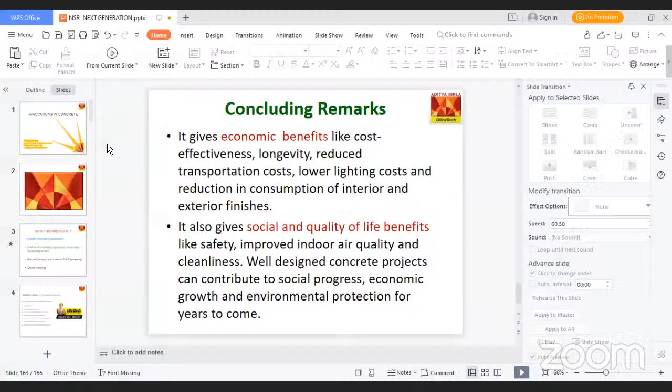Good morning, Srinivas garu. Am I audible now? Yes sir, it is clear. Okay, let's try sharing the screen. Can you give me co-host access? I've already given it to you sir. One second, let me check. Should I stop sharing the screen? One second. I think it's visible now? Yes sir, keep it in full screen. One second madam, let me adjust it. Okay sir, you can keep it like that. Anyway we are starting, pardon me. No need to stop sharing now sir, just keep it on like that. Okay, we are starting anyway. Okay sir, two minutes.

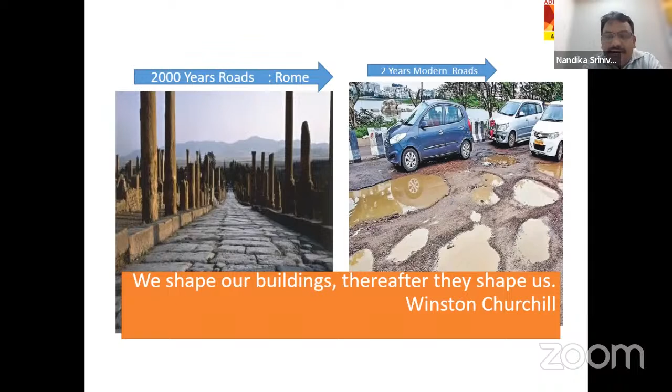Winston Churchill said we shape our buildings, thereafter they shape us. This has a lot of relevant meaning for today's RISE fourth conference, going on in this college, where we really have to build structures with care, love, and dedication, so that they become futuristic, iconic figures, and there are a lot of savings to the countries too.

The part I'm stressing on, locally available, is most important, because if you utilize locally available material, there is a lot of savings in revenue. For example, if you want to construct any building, if you're able to judiciously utilize local material, that gives a great feeling.

And on the quality concern, this photo reminds me of the old people. I remember my grandfather's remarks that old constructions are much better than recent construction. This photo also gives me the feeling that yes, there is a need to change a lot of things in the recent scenario.

Now everybody knows stone was considered one of the materials. Initially, in the Stone Age, people constructed a lot of monumental, durable structures. Still it is witnessed that the Great Wall of China can be viewed from the moon, showing that the engineering techniques were actually very superior, I can say, but not today. Today people perceive it is not.

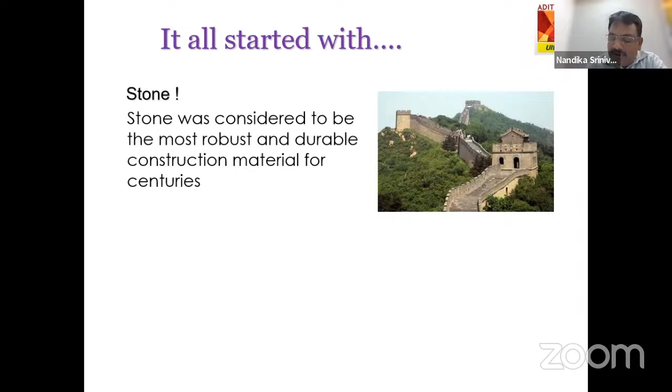But everybody knows stone has a lot of problems. I need not discuss this because many slides are self-explanatory, so I just try to pitch the context relevant to the audience. This presentation can be shared again, I will share it in PDF form so you can also take it. These are the constraints of the stone where we're not able to build faster and efficient construction in recent times, because of availability of time and everything.

So concrete was one complete solution, I can say, also called a flowing stone, where you can mix concrete ingredients with cement, aggregates, water, and whatever else you want to add, take it to the site, and shape it however you want. Like a mold, you can make whatever shapes you need, and at your ease, take 1 or 2 hours to place and finish the concrete. So concrete is like a flowing stone generally.

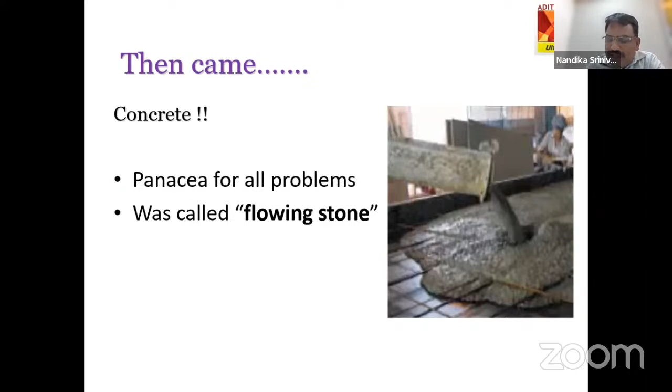That is the olden pattern people generally used to say. Now a lot of changes have happened. People have also started special concrete, which is the topic of today, where we can alter or change the properties of concrete behavior, composition, and performance.

Whatever things you would like to change as per the need of the hour, or the need of the client, or the need of the day, you can really change, because there are properties mentioned in textbooks or guides that certain properties of concrete have to be followed.

But if you really want to change the specification, for example in RMC concrete, we often use retarders to delay the concrete supply at the site when it is a long distance away. But we also ensure there are no changes in the composition, behavior, and performance during execution at the site. That is called special concrete, one classic example.

There are a lot of possibilities, which I will be showing in this slide.

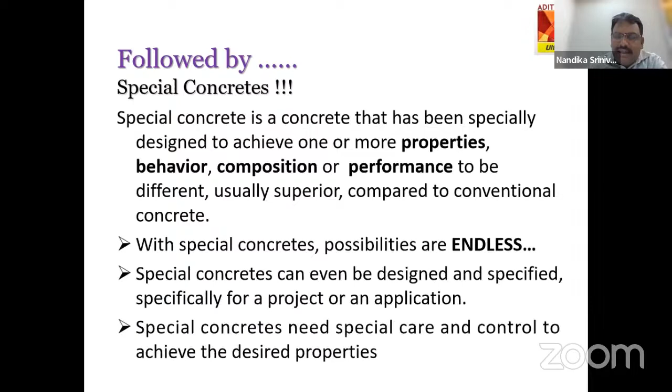These photos are from one of the challenging projects during the transition time of Telangana formation, where the government decided to give free 2 BHK houses to the entire people of Telangana, which was a promise agenda in the election campaign. So when the government came into power, they wanted to implement this. We went to one of the sites, called Eravalli, which was one of the starting projects of the 2 BHK scheme in Telangana.

This is the house, actually taken from my camera. These are some glimpses of the houses where we wanted to replace the old mud structures or old houses with new innovative technology.

But there were two major constraints. One was the challenge of time, because they wanted to complete it very fast, and the other was cost effectiveness. Anything related to speed of construction really requires a lot of revenue to invest. So the challenge was thrown to the engineers by the government: what is the best solution we can give to the people of Telangana with low cost housing techniques, very fast building technology, and durability also. These were the major challenges thrown to the engineers of Telangana, and there were a lot of options available.

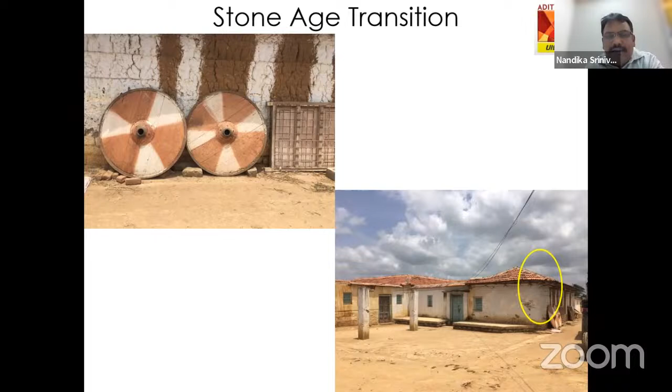People suggested this and that, but ultimately they chose a technology called Rapid Monolithic Design, RMD, where they used aluminum sheet centering and used to cast the building in a very fast way. In the order of days, every week the superstructure was completed very fast, because once the foundation and plinth level were constructed, it was very easy to construct the houses.

This is actually the place where the site was taken. It was really a low cost technology, and it was very fast also. People also admired that the quality of living was very good. So these are some of the glimpses. Now that is old technology, but this was a challenge for us.

So when we look at this, there are some virtues of concrete. Concrete is very safe, but many people are under the myth that concrete uses a lot of natural material resources, and that it is an energy-intensive material which consumes a lot of energy and emits a lot of carbon dioxide, which is a threat to the environment. But recent technology changes, right from the inventory machinery to the process making to the materials used in manufacturing cement as a raw material in concrete, have helped reduce carbon dioxide emissions significantly, from 1.5 tons to 0.75 tons.

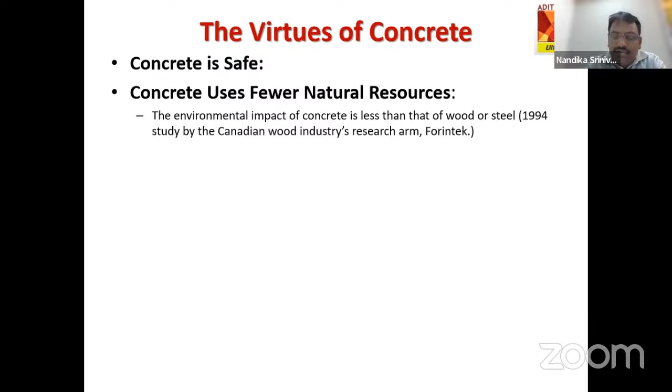Efficiency and sustainability have also been taken care of. Gone are the days where people always related concrete to environmental damage. Concrete uses supplementary cementing materials, which will be discussed further. The beauty of concrete is that it uses recycled materials very efficiently. Very few industries actually use recycled materials to make a sustainable product like this.

For example, people can add anything to concrete, like fly ash, and everybody knows GGBS is commonly used nowadays. But many people also use plastic, rubber tires burned for fuel to give efficiency, and even leftover oil as fuel for the machinery to run. They use a lot of such materials. I'll be showing what materials can be used in concrete to give a sustainable product.

Having said that, I was also referring to CO2 emissions. When concrete is used with blended cement, all these benefits can be achieved: reduction of CO2 emissions, reduction in fuel consumption, use of supplementary cementing materials, utilization of qualitative materials, and improved production capacity.

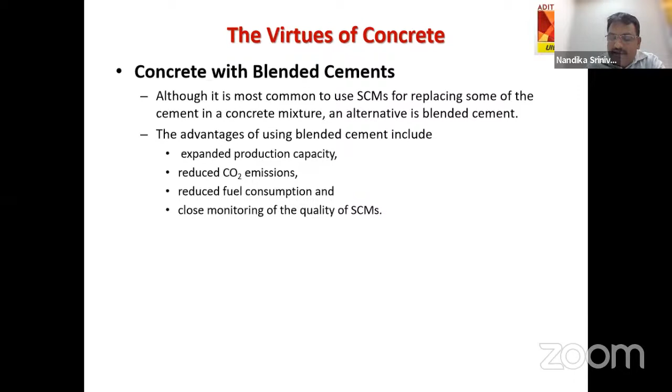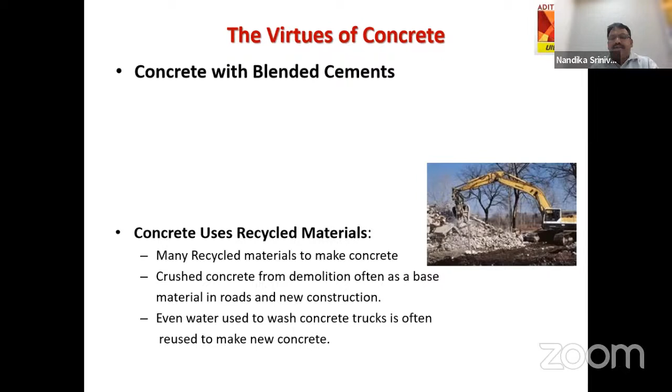These are some of the recycled materials being used. Even the water used to wash the trucks is used for making new concrete. If you wash the transit mixer, the water contains a lot of cementitious material, so that can also be used in making concrete.

These are some of the aesthetic aspects of concrete. If you see the beautification of concrete, we can build a lot of structures with it, especially tall structures, and marvelous buildings around the world. Now every city or country, if they want to showcase their strength or invite tourism, wants to build the tallest or most iconic structure.

So now the pride lies with each and every part of the country. They resemble the country or city by its famous structure. Earlier, people used to relate or resemble their city with a river or food items, but now people want to recognize their place with an iconic structure.

For example, if you go to Dubai, you can see the Burj Dubai. We will not say that it's famous for its beautiful beaches or facilities, but we'll relate it to the Burj Dubai. People say the Eiffel Tower for Paris. There are so many buildings I can relate this way.

So now, friends, that is actually good news for all of us as young engineers. The opportunity lies for us if we really work in civil engineering and improve our subject matter, especially in tall structures. Then a lot of people will be hiring you in a big way, because the order of the day is tall and iconic structures.

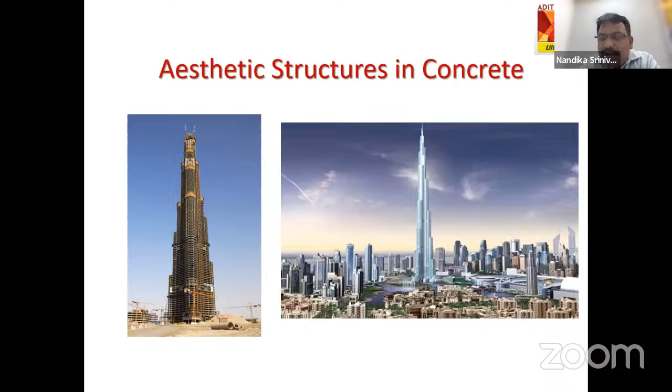These are some examples of people fighting to construct the tallest structure in their cities. Where once we wondered about 120 meters, people are now going for 800 meters, even 1,000 meters. There's a race for each and every city or country to construct the tallest structure, which gives insight into the lot of opportunity for civil engineers as a whole.

Going back to my earlier slide where I was saying that concrete is often considered a dull and gray material, now many techniques have been developed where we can really make concrete colorful by using concrete dyes or pigments induced in the concrete so that it becomes beautified.

This is one of the talks of the day - recently people are talking about 3D printed concrete, and a lot of innovations are being done in this field. People are making houses from 3D printed concrete, and now in Bangalore, 3D printed structures have also started being executed in recent days. Soon there will be a time where people can order a building as per the design they want, the color or the texture they would require for the concrete.

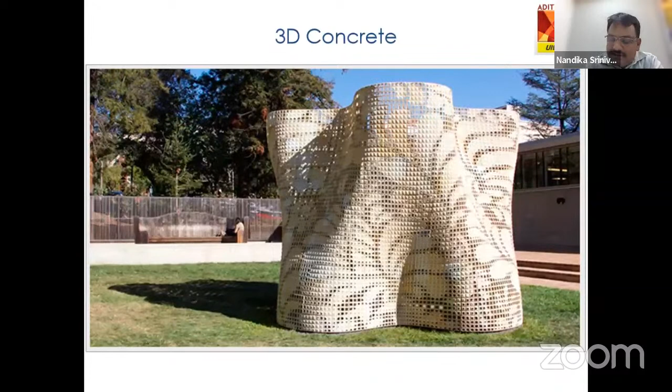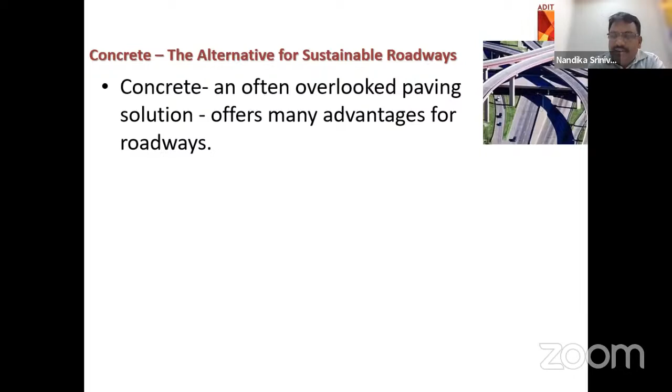Now there are changes in this - the connectivity part I was referring to. Sustainable roads have been built, and the advantage of this new technology, which I'm going to refer to in the next slide, is that it also reduces or eliminates the problem of potholes.

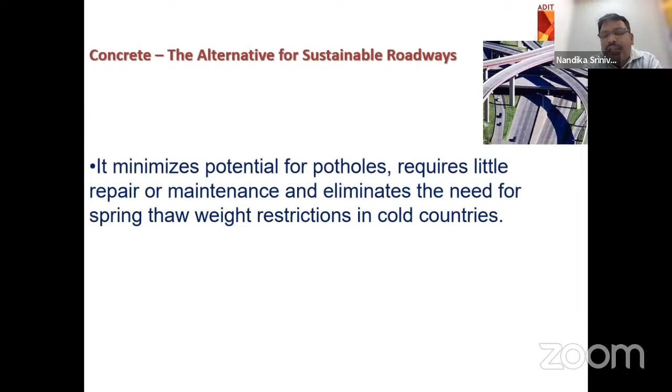If you follow the industry now, people are talking about pothole-less roads. This is a new technology we have recently started - a product in the way of cement, where it repels water molecules or water particles in the cement itself. What happens is cement is often transported, and even small moisture can really hamper the quality of the cement. With this new technology using hydrophobic polymers mixed into the cement particles, it allows transportation for a longer period of time, storage is improved, and even in case of less moisture or sudden rain, we can really protect the cement with this small technology.

This is actually proving to be an innovation in the industry right now, where people are using it. It also allows less water to be used in the cement - basically it doesn't allow excess water to be taken in. So this is the new product we have recently launched in cement.

I was talking about potholes - this technology is called white topping technology, and many cities are now adopting it. We have also done it in Hyderabad, on road number 10 in Banjara Hills, where we took a 1 kilometer sample as a trial for the Government of Telangana, and all the cement companies participated and showcased that this road would actually be without potholes. Even now, after 12 to 13 years, I can say the road is still performing very well.

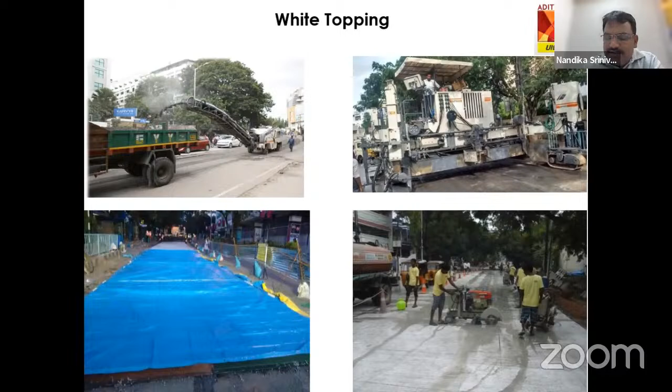This technology is one of the sustainable, innovative technologies that people can try. If you see the finishing, it's wonderful, and it can be constructed in a very fast and efficient way with very little manpower. So many cities have been adopting this. These are some of the recent advancements in concrete and materials.

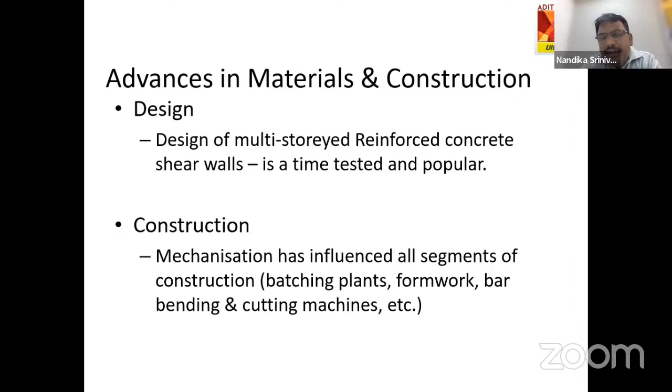There are some changes now, with people using a lot of new innovative materials. For example, in batching plants, I was referring to this aluminum formwork, which is very light in weight. It can be fixed with 2 or 3 laborers with a proper plan, using a nut and bolt system.

It also gives the advantage of addressing the shortage of quality manpower. Whenever there's a shortage, we can train people at the site and they can fix this formwork in a very fast and efficient way. People can use this as rapid monolithic design, or RMD technology, as we call it.

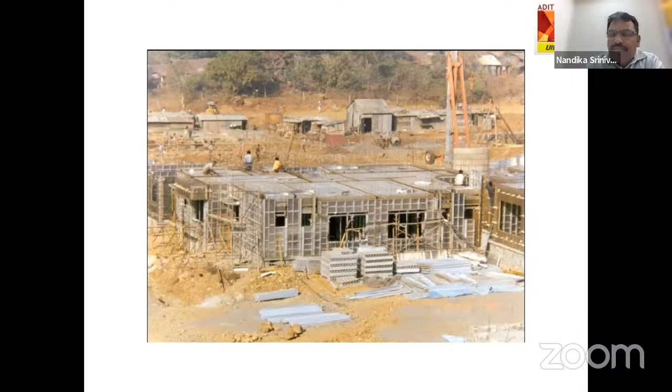This is a glimpse of a site where it's fixed - you can see only 3 or 4 people are working on the entire 1,000 square foot building. Compared to a normal conventional concreting site, it would take more than 12 to 20 people executing the job. These 3 or 4 people can even build the staircase in a very fast way without any joints or distortions in the concrete, which is still challenging even now.

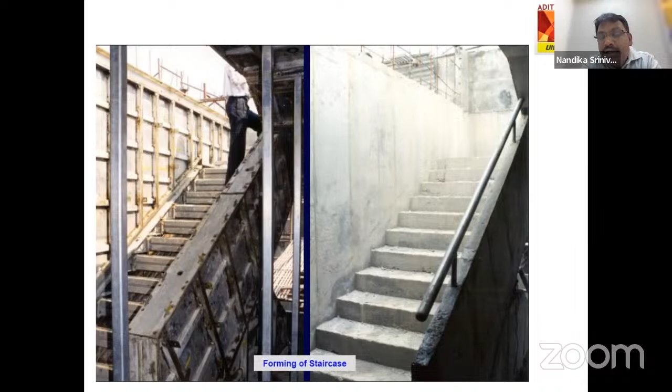People often cast the staircase separately or differently. But with this technology, the staircase can also be part of the total slab process, which is a major advantage.

This is a closer view of the building where everything can be fitted in a single nut and bolt system. You can remove it and take it to the top - first floor, second floor, whatever the number of repetitions. Repetitions can be done in a faster, easier, and more efficient way. And you can see the finishing.

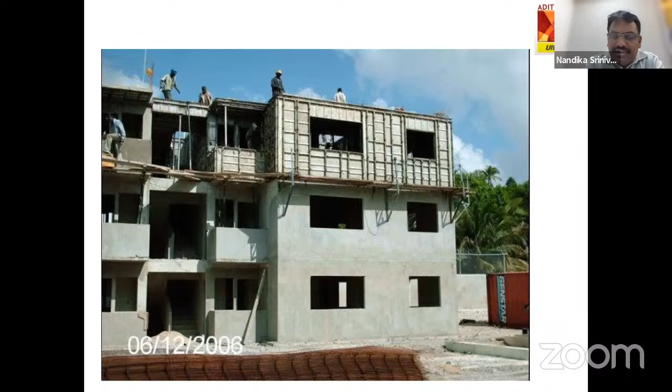This is the technology we utilized in 2006. If you see these buildings in a better way, the entire 4-story structures were completed in 16 days. So this superstructure method is very fast and easy to construct.

Now this technology is being followed by all the multinational companies and big construction companies for faster construction. They're using this technology to improve the rate of construction, because for any given project, it depends on revenue - the faster you can construct or hand over the project to the client, the greater the savings. So this is one of the proven technologies people are using.

Some plastic formwork is also coming into the market, where even for smaller buildings like 2 BHK, 1 BHK, or individual houses, people can use this plastic formwork to improve the quality of construction, because the recent use of MS steel is very heavy in weight.

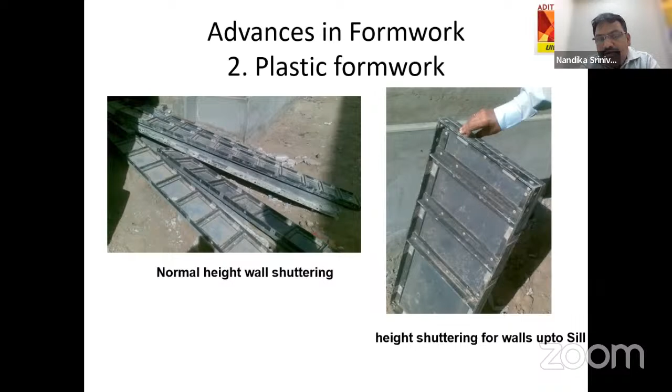There can even be distortions if it's not handled properly, so the concrete won't come into the proper shape and there will be no alignment. But if you use this kind of plastic formwork, the speed of construction improves and it can be used by a single person, like a simple nut and bolt process, and the alignment will be proper. These are being used for retaining wall technology or whatever else is applicable.

So these are some of the innovative materials being utilized now. Everybody has heard about foam concrete - this is a lightweight concrete compared to conventional concrete which is 2,400 kg per cubic meter. The density here will be 400 to 1,600, making the concrete very light. It's used in different ways, like for bricks - autoclaved aerated bricks - which really improve the speed of construction.

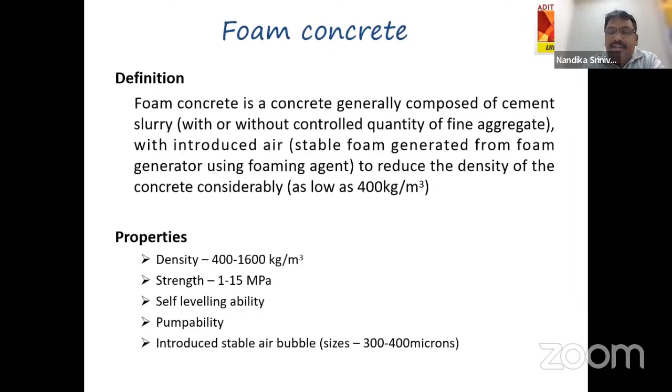If it really plays, it is really great. Can you just tell me if this video is playing or not? So this is one of the showcases in our product where it really floats. The concrete really floats in this one.

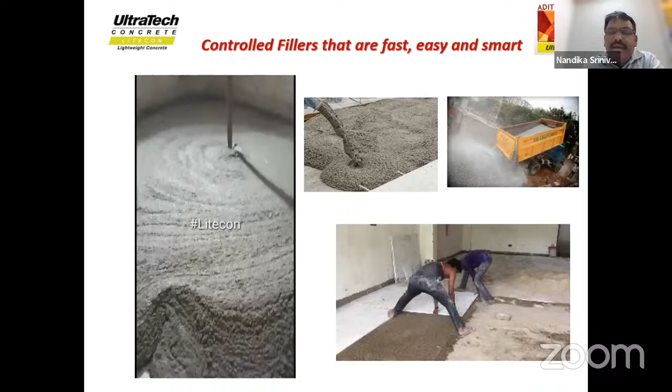From Ultratech's point of view, we have converted this product into the form of lightweight concrete, brand name called Litecon, where this will be a lightweight concrete used for screed concrete or sunken slab concrete, wherever you want to keep it. And if there is an alignment problem for bigger areas of slab, it can be used as adjustment concrete.

These are some of the applications where people can really use this one. So these are some photos, and these are free flow concrete, which everybody knows about as self-compacting concrete.

Ultratech comes in the brand of Free Flow Plus concrete, where you can order it through RMC, addressing problems related to congestion of reinforcement, which is required a lot now because people demand durability and earthquake resistant structures.

The steel actually goes in a huge quantity, and if you use conventional concrete, there will be a problem because of the size of the aggregates, the flowability, and the air voids. So this concrete can be used in a better way.

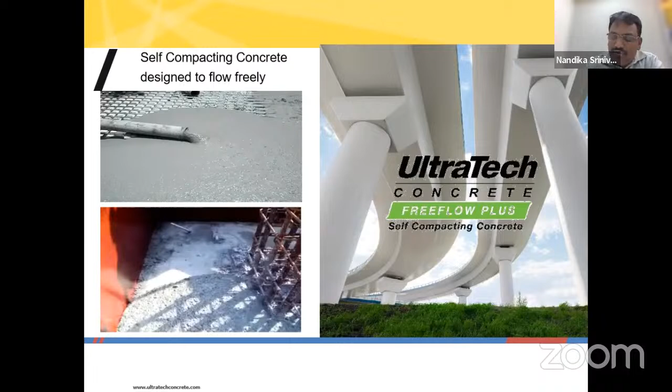Something I want to relate to the context of this presentation: I will be showcasing new innovations in concrete, and relating these to real applicability, including the commercial aspect, because we perceive that we learn a lot of things, but when you go to the market and search for the product, it is not available.

So what I'm trying to input here is that my focus will be on concrete which has been innovative and also available in the market. These are some examples of wherever it is required, and I will also be showcasing some case studies.

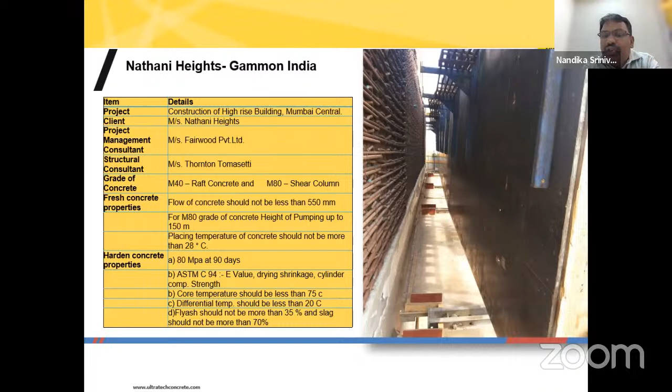In this case, the congestion of reinforcement was a challenge for us, and the temperature was also a challenge. So we used a free flow concrete where, if you see the fresh property, this is M80 concrete, and the temperature should not be more than 28. We ensured using this latest technology that we utilized this one.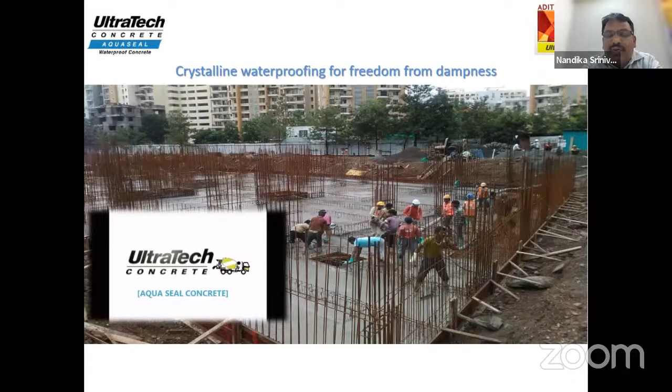In the recent past, a lot of fire accidents have happened in the city of Hyderabad for so many reasons which I don't want to discuss. But having said so, if a fire accident happens, it leads to a catastrophe because many lives will be lost. We have seen this in the past also, because people cannot move out.

The whole idea is that if you can really reduce the spread of fire in a concrete structure, if it catches fire, that spread can be reduced for up to 4 hours. This means we can evacuate people in the buildings to a safer place, and we can also save our costly belongings—that itself is a great achievement for this concrete.

So Ultratech comes with a fire-safe concrete, which is a fire-resistant concrete based on vermiculite. It also allows fire spread to be reduced for 4 hours, so it delays this process.

Especially it can be used in ducts, where fire typically spreads, and in lift areas, where the spread can be eliminated or reduced. So these are areas where it can be applicable, and it helps a lot. These are photos where we have used this concrete in different places—ducts, lifts, and passageways.

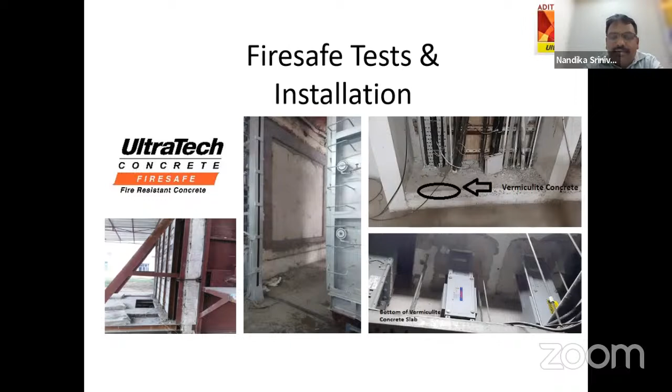Everybody knows some pervious concrete. Now we are basically trying to change the property of concrete. Normally we relate concrete to being hard and impermeable—it should not allow water to pass through, because if water passes through the concrete, it will contact the steel present in the concrete and start the corrosion process, which will definitely affect the concrete structure. So the durability will be at stake.

Having said that, concrete properties can really be changed—this is called innovation concrete. This is pervious concrete which allows water to pass through. It's also called no-fines concrete. This is a photo of the cube we cast to test the strength of the concrete.

If you see, the holes—the passages—are actually interconnected, which means water can flow through, but at the same time the strength is not compromised. This means it can be used in many places.

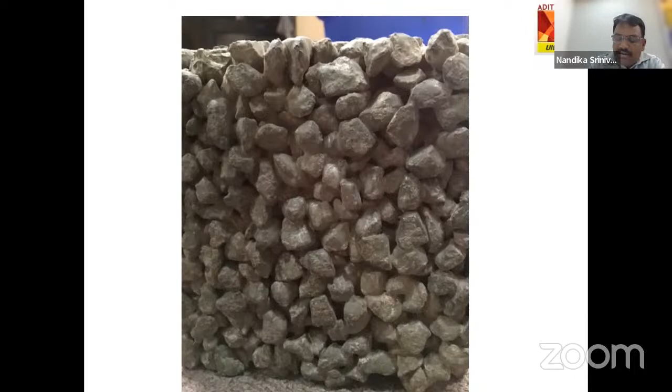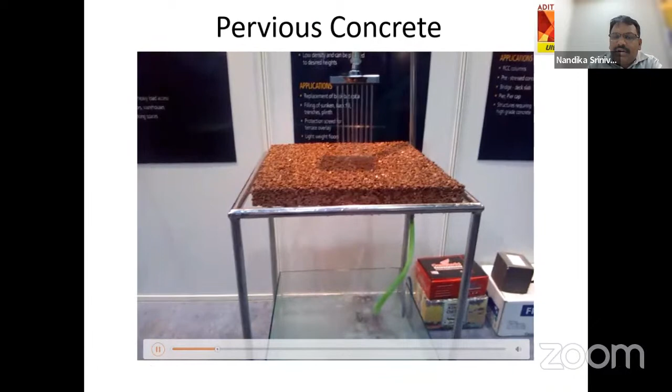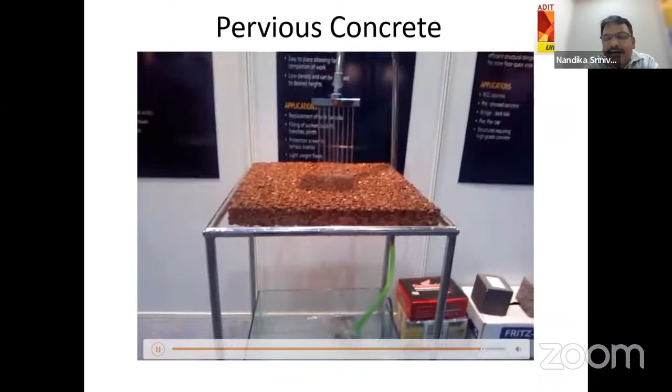Because of the many problems people face, they started thinking differently. This is one video I can show, where water is flowing from the top and going directly down—it's like a filter kind of thing. The beauty is that it allows water to pass through.

Now for the applicability—people say every city has now become a concrete jungle. They say if you use a lot of concrete, there are no trees, and there's a lot of deforestation happening again.

The main problem with concrete roads, people say, is water permeability—because the water table isn't being improved, since water isn't percolating down into the earth. So what's happening now, even with heavy rainfall...

In parking layouts, walkways, or areas near rivers or water collection zones, we can use this concrete to allow water to pass through, and it will be stored in a better way. This can also eliminate the problem of water scarcity, which has become a burning issue for any city or country now.

So this shows how we can reduce these issues by using the pervious concrete while also allowing for environmental benefits. These are the applicability areas—parking lots where a lot of trees are present. We can use this concrete, and water can be used as a source, allowing the trees to also live.

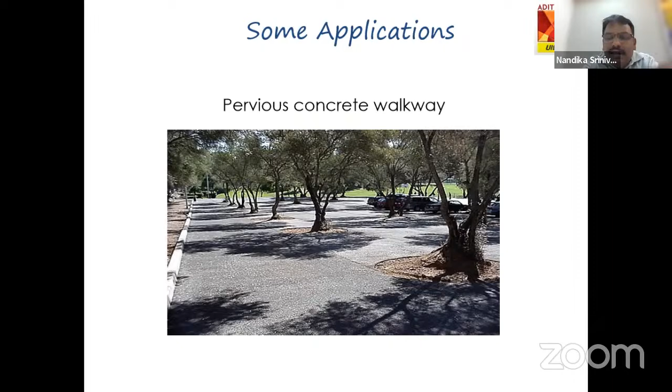We can also sustain, and all greenery will be there. So these are some of the applicability, right from the swimming pool decks to pavement edge drains, bridge embankments, swimming areas, everywhere we can use this.

So these are the concrete which, as I was referring to, the normal and conventional concrete. Now architectural concrete is also playing an important role in concrete. People are thinking about beautifying concrete, and this also requires a lot of effort and work.

So some examples where I can really show you how concrete has been used in beautification. This is called polished concrete, where it replaces tile and flooring. In large areas like shopping malls where footfall is very huge, using tile or conventional flooring leads to a lot of abrasion, meaning the texture gets spoiled within 2 or 3 years.

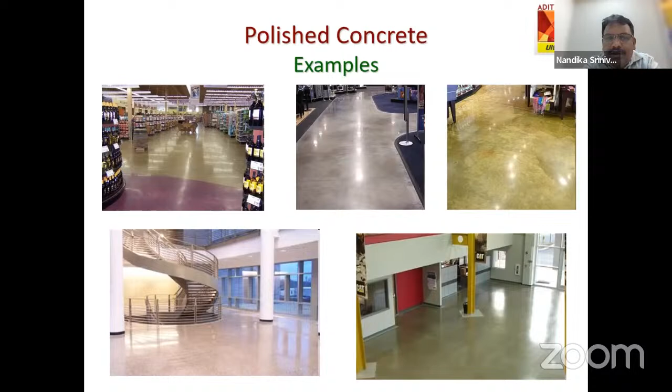But using this innovative polished concrete for flooring with high strength parameters, this can be eliminated, and it gives a lot of aesthetic value, because it gives a wide and glossy finish. So power consumption will also be utilized in a better way. This is an advantage, and some examples are all been used with exposed or glazed concrete, where polished concrete has been used.

So we have Ultratech, who have also come with one product called iFloors, which is used for industrial flooring, where we use steel fibers, because industrial flooring is different from commercial flooring. It requires a lot of strength because it uses a lot of machinery equipment on the floors. So to make durable floors, we use this. This is a grade where right from M30 we can also use this.

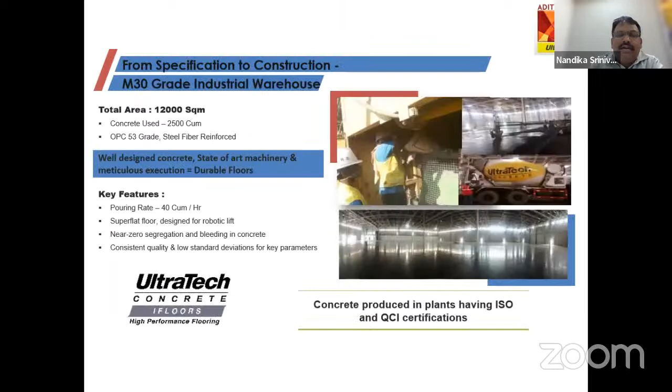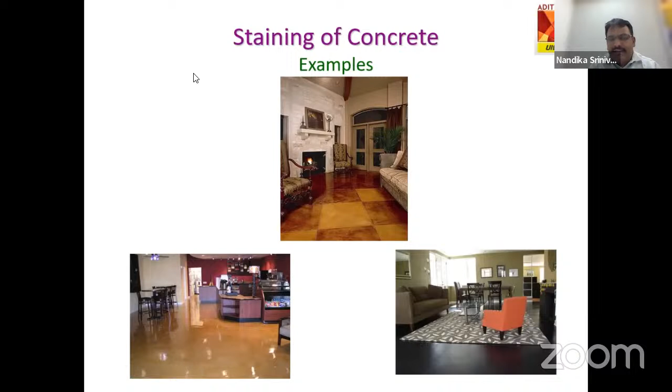So people are also trying to beautify by playing with the chemistry of the concrete, where they etch acid on the surface of the concrete to beautify it. These are some of the concrete types utilized across the world, where staining of the concrete occurs, where people use acids and everything to change the texture or top texture of the concrete. So dyes are actually used.

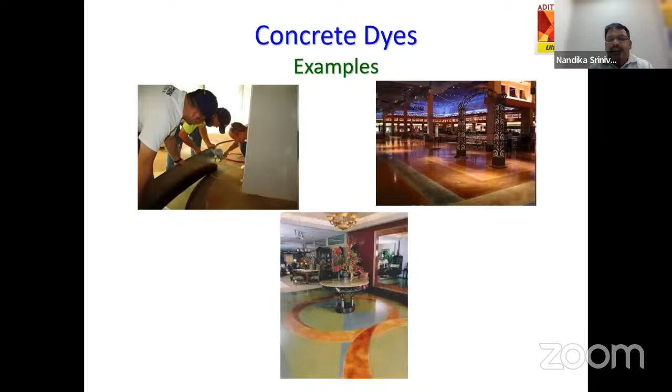I was referring to colored concrete now. I'll show you some of the concrete which has been used with dyeing or coloring agents. See, some of these features, these colors can be made using color dyes or pigments in the concrete. We can really make this, and these are some of the advantages of decor. Like this, it is made.

We are replacing natural stone now. What is happening here is that, as I already told you, there is a lot of disadvantage in using stone, because of availability, robustness, transport, everything. So this can be as per the flavor of the customer or client. We can really make concrete into stone-like forms, or better landscapes. So you see, these are areas where we really beautify with colored concrete, where all these are being made with concrete.

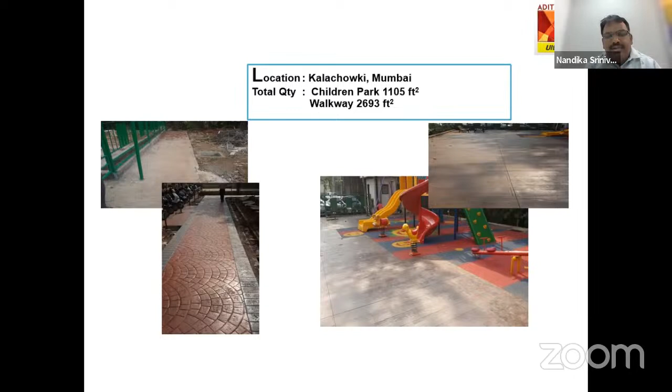This is not with tiles. So this actually gives people a nice feeling when staying there, especially children, who want to spend more time in the play area and everything. So this can be interesting too. Some people use stamp concrete, where it replaces natural stone. These are some of the things that really improve the structure's life, everything.

So these are the forms, like wood finishing, that we can also achieve. Whatever finishing you want to achieve, we can use exposed aggregates, sand wash, and stain concrete.

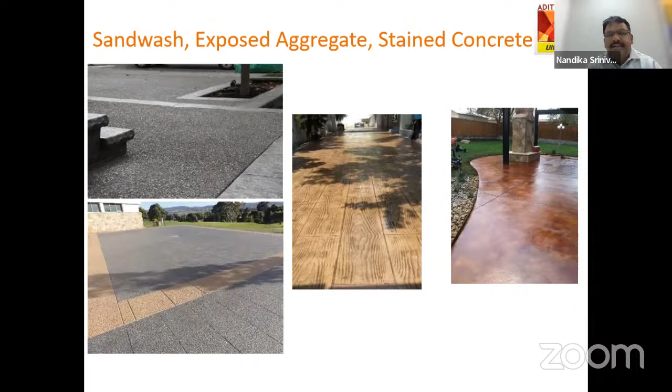And now people are talking about strength beyond the limit. Earlier, people used to refer to concrete as durable if it attained M30 grade, which was also very good. M40 is one of the things which can really be attained. But ultra high performance concrete makes your structures very slender, makes your life very easy, and it is also used for precast elements, where it gives you structures very speedily.

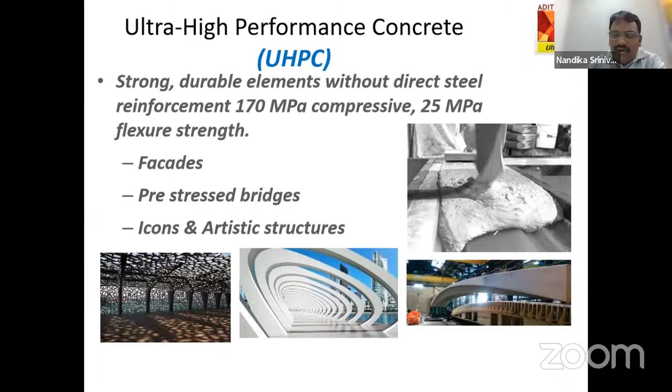So this can be used. This is ultra high performance concrete, where in Ultratech also we have a brand, Ultratech ultra high performance concrete. Although the stencils on the concrete surface, like people are using this technology, where whatever design you want to transpose on the top surface of the concrete, we can really do it with this technology. This is one example.

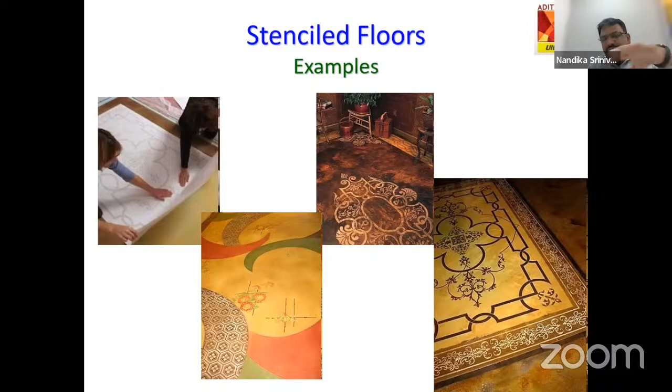And this has been used in a very iconic structure. Now there is concrete furniture. You can make tables, sitting places, pots, whatever things you want to make. Concrete is actually coming up as a real example where many people are using it as furniture. If you see this, the advantage of concrete is that it is very slender and it almost resembles wood.

Wood has a lot of problems, for example termite problems, decay, maintenance - everything is a problem for wood. So this is absolutely a zero maintenance thing, where it can be made in a simple workshop and assembled in a place, and it will last.

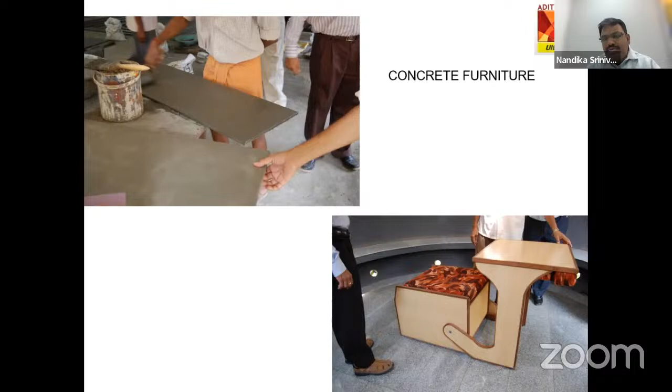So especially in colleges, you can really put forward this furniture as a replacement for wood. This is one example where, see, something which even can be made with this concrete - seating places, even some decorative items, even the staircase which has been there. So all these can be made with concrete. This is the beauty.

We're trying to replace wood. We already replaced other materials. Now we are trying to replace steel also with this superior quality of concrete, where gates can be manufactured. All of this is done with concrete only, not steel. So please remember, this looks like a steel one.

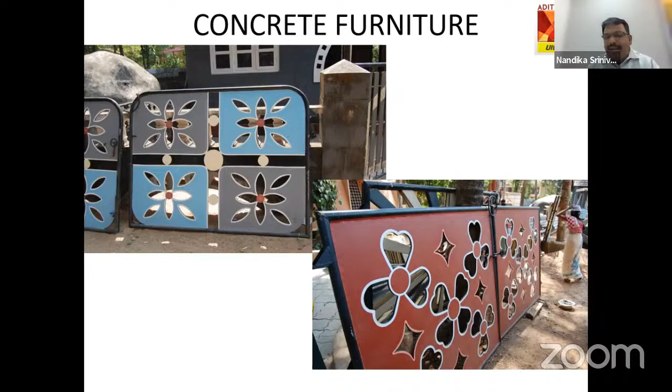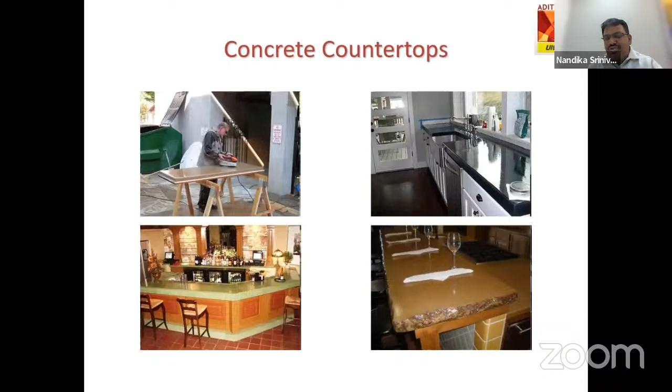It's much more durable and effective than steel, because steel requires a lot of painting after that, and maintenance. So people are making countertops, for example. These are some examples where concrete really replaces natural stone or granite, because concrete can be polished in a better way. These are some examples from the internet.

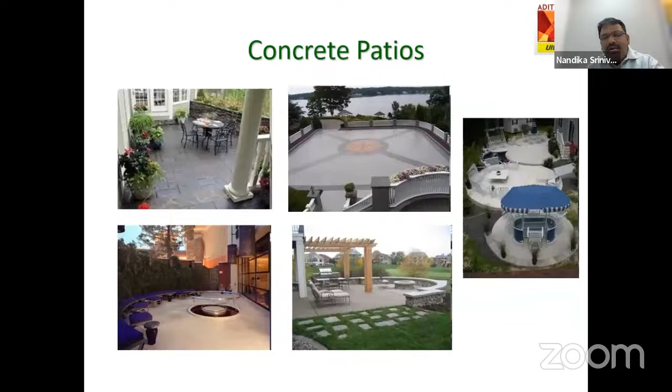I don't want to spend a lot of time on this, but I just want to expand your thought process on the horizons of how concrete can really be utilized in a better way, analyzed for our construction. These are outdoor parts, patios, where really all these are made with concrete. These are some things I really want to showcase for young engineers, so that they can also try new things in this process.

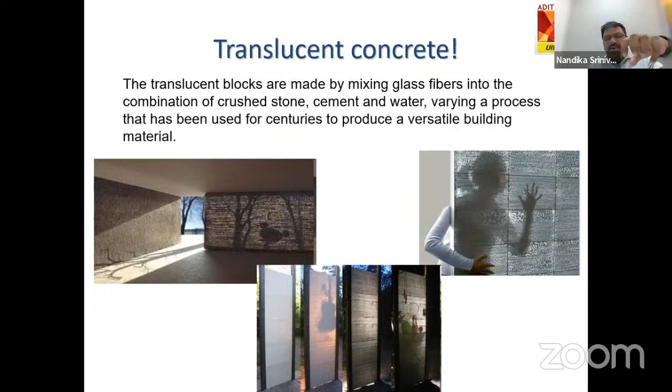See, this is called translucent concrete, where it behaves like glass. It behaves like glass and is more durable and unbreakable also, I can say. So when light is thrown upon it, it behaves like glass. When light is not there, it behaves like normal concrete. For easy understanding, I can show you some photo and video.

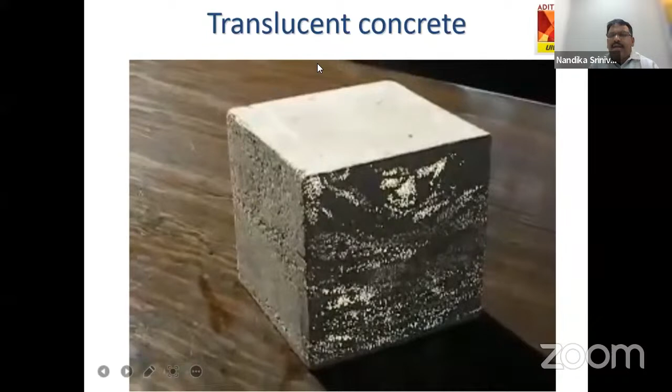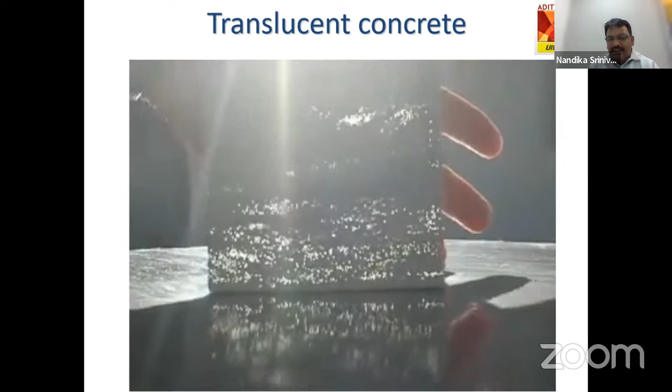This concrete is called translucent concrete, where if you induce light, it behaves like normal glass, right? There are a lot of crystalline products and other things being used in this. So if you can see, you can even see your shadow or what is going on behind it. This is like a transparent material.

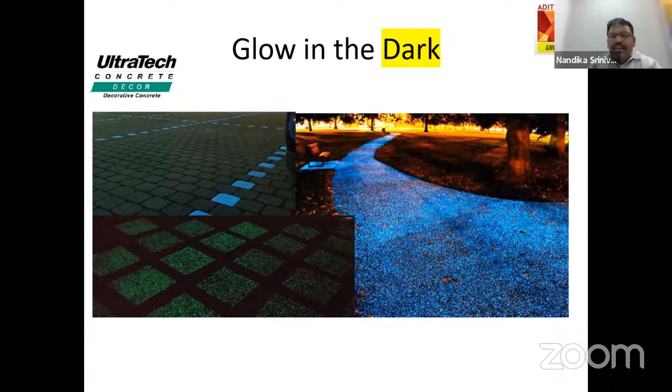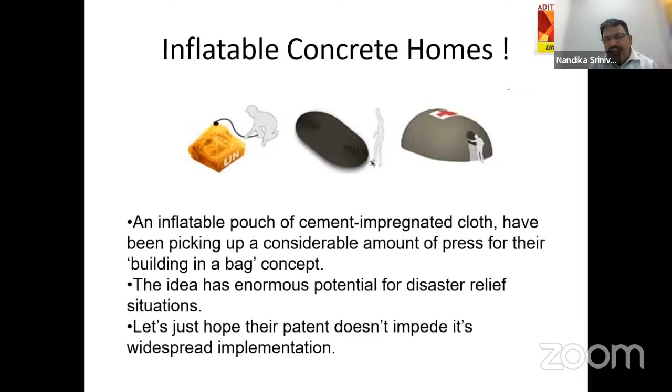So concrete can be bendable. People think concrete is not bendable, but with a lot of fibers, we can make it so. People are also adding waste paper into the concrete to make papercrete. People are also using this concrete cloth, called an inflatable concrete homes, which comes in a pouch or packet. It can be pumped with air, and when water is sprayed on it, it behaves like strong concrete. You can use any type of water, fresh or saline, and when used, it really turns into a wonderful thing.

So now I was thinking, I just want to ask how much time I have got now. Sir, you have half an hour, sir. Okay, that is fine, seems to be good.

I'll try to finish within another 10 to 15 minutes, since it's often said that any lecture should not continuously flow for more than 40 minutes. If it goes more than 40 minutes, it becomes like a bouncer to us, because our mind has some limitation in capacity to understand the process, and it's even more difficult in one-way communication. So I'll try to complete as fast as I can so it's easy to understand for each of us.

So right from where I was talking, concrete pots can be made. Now we can also add some sensors into the concrete itself before pouring, so that we can review the concrete's strength, the aging process, or the gel formation. We can see these things and really improve what is required or necessitated for the construction of the future.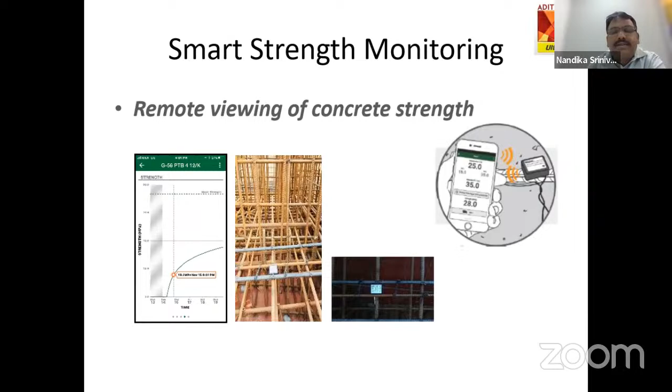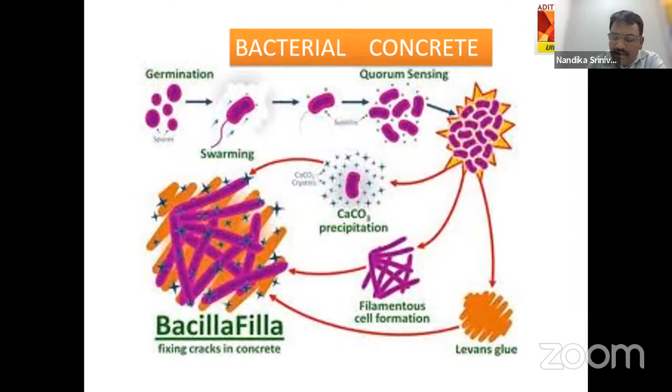So what is happening now, people are talking about bacterial concrete - bacterium can be used in the concrete. A lot of research is being done on this. Having said that, I just want to show this kind of process. Everybody knows concrete is a wonderful material.

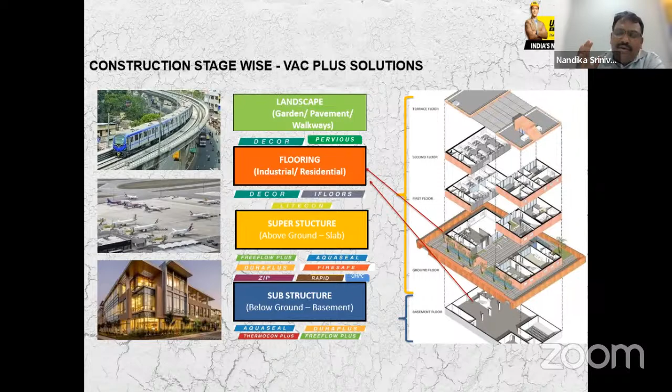People think that concrete is manufactured at the site and transported through transit mixers, or we can also deploy our labor and make the concrete. So it's a very small thing, if you want to repair a small pothole or a small work at your home, you need to go to the market, get materials like cement and aggregates, engage a contractor or labor for one day, pay them, and he will finish the work.

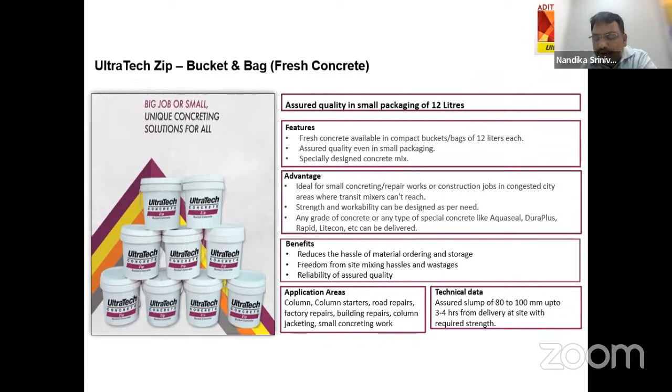So it can be used for starters, basically for road repairs and other things. These are the applicability where starter people need not wait for labor to come. They can order from UltraTech and utilize it, finishing that work in a much faster way. This comes into buckets or dabbas and can really be transferred.

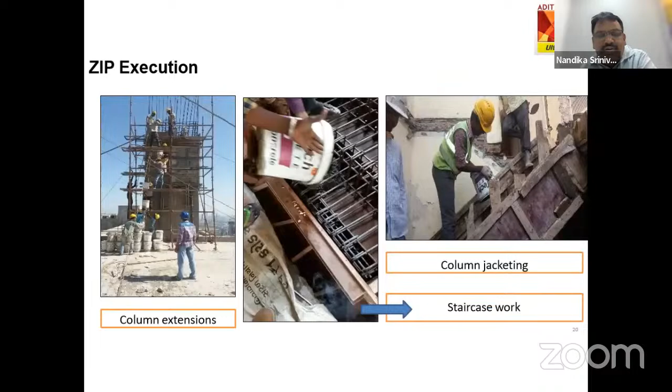So the whole idea is the reachability to the customer. We are making it into small forms we can use in any form, like column jacketing also, stair work also, column extension. This is called Zip concrete.

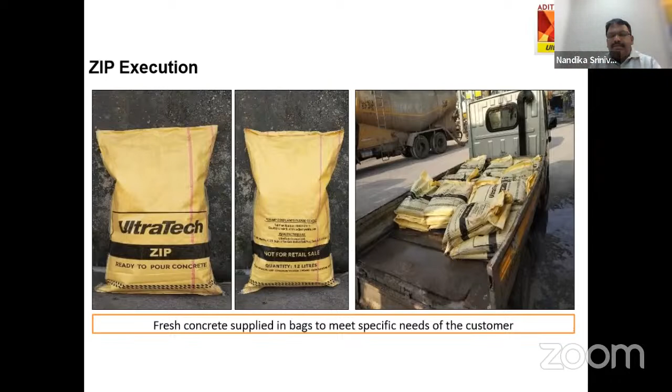Now apart from the bucket, many people think the bucket is free of cost that we can utilize. But the other way is it comes in a bag which has been lined with a protector along with water. You just open that, add the required water, mix and shake the bag properly. The ingredients will be mixed thoroughly, and you can use this concrete.

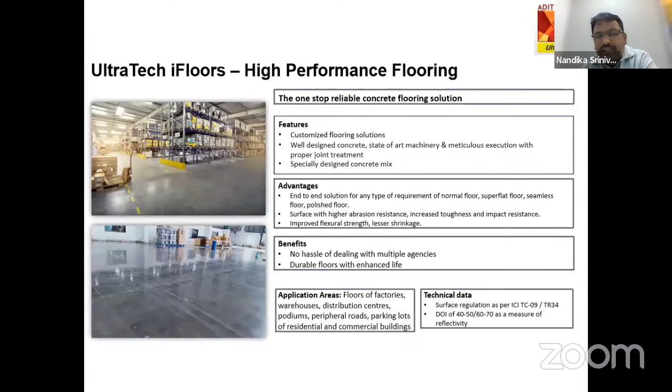If you can see, this is applicable to the iFloors which I was referring to, and this has been used in Mysore. All these things we have been showing have actually been used by the customer.

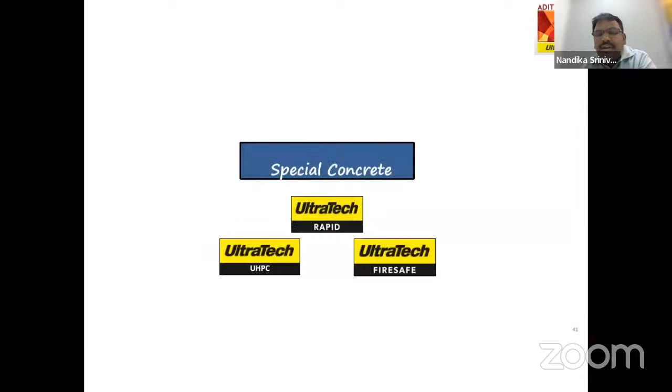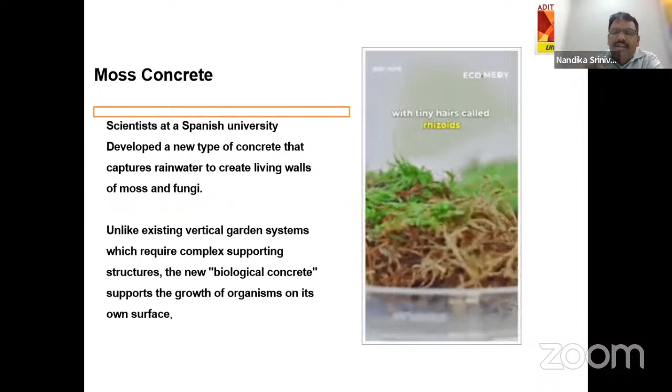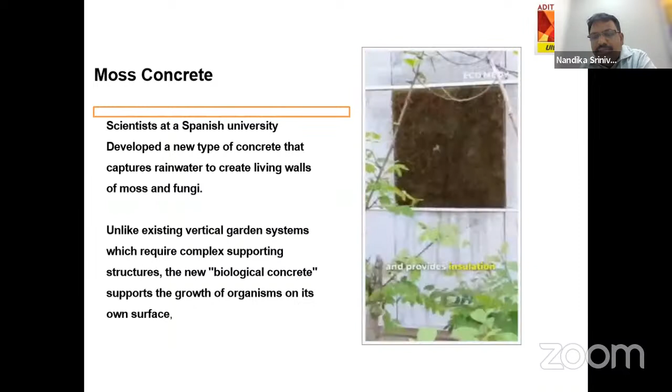Another new innovation is called moss concrete. I want to showcase this as part of modern concrete. It's a biological concrete that allows moss to form on the surface, which helps with water retention and gives a greening and beautifying effect to the building. If utilized properly, the moisture content helps the structure remain long-lasting and durable.

This technology has recently been started. Earlier I mentioned ordering concrete in a small bucket, but now you can order your house as a whole. You give your order for a house, it comes ready, and we fix it on site, so you need not worry about the entire construction process. This is called a ready-made building, which comes in forms like a villa.

Everything is fitted into the house, which comes on a big truck, and one crane is required to assemble it. Within 2 to 4 days, the entire structure is ready — compare that to 45 days to build a house normally. This is useful if you have a time challenge, like people wanting to do house warmings quickly. This technology can be utilized for any smaller houses, G+1, G+2.

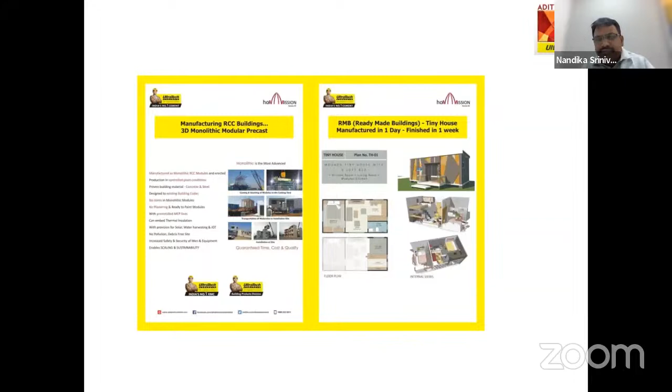We also have 3D monolithic structures and precast structures where everything is ready and can be assembled into units, allowing us to make a house in a better way. We are essentially racing against time, constructing as fast as we can, which saves a lot of time and energy. These are some advantages of ready-made buildings. If you want a tiny house, it can be manufactured in 1 day and delivered within a week. That's the beauty of this structure.

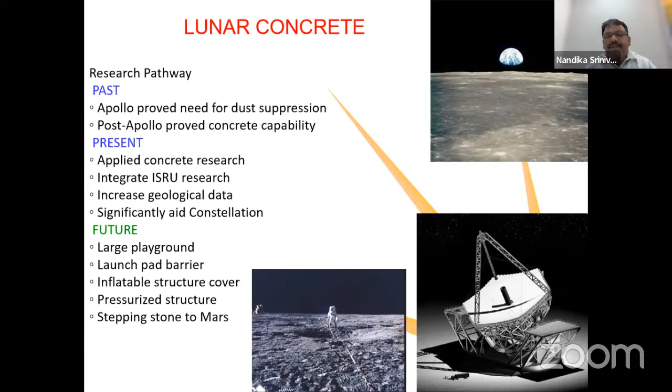We use concrete on Earth, and now people are trying to take concrete to the moon also, called lunar concrete or lunar-crete, where researchers are trying to establish things on the moon. In the future, if people go to the moon or another planet and want to build a base station or research station, concrete will be required. People are doing a lot of research, and there's an article in the news about trying to make cement in space, since cementitious materials are available on the moon. They are trying to utilize those materials to make cement there and construct with it.

So friends, these things will come to pass — the day will come when civil engineers are required to visit the moon for site inspections. I'm looking forward to those days, and I'm sure they will come within the next 10 years, when we'll witness concrete going beyond our limitations, beyond our Earth.

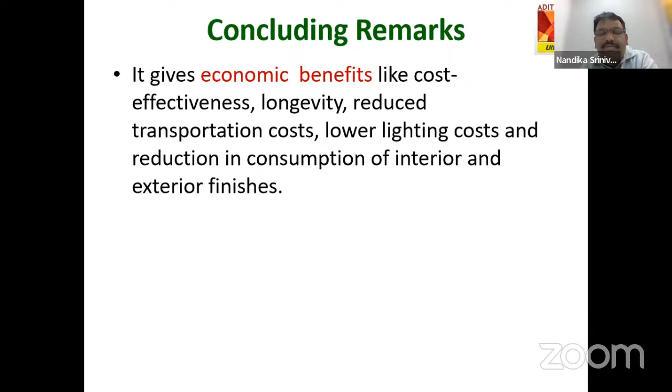Having said so, I just want to conclude that concrete gives a lot of economic benefits, right from the increase in the structure life, transportation cost, everything whatever I just mentioned, so that it really helps us for better social and quality life. So these are some things I just wanted to project in front of all the participants here present, so that it will help us to take it forward.